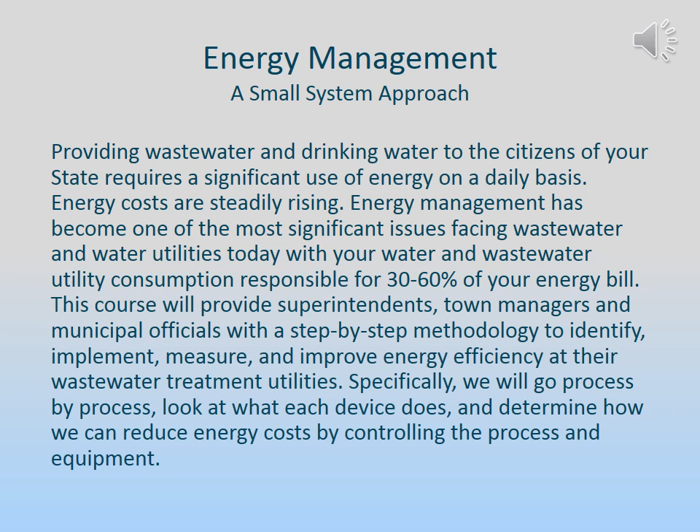So remembering that our primary function is to be in compliance with state and federal regulations, regulations relating to our NPDES permit and the Safe Drinking Water Act, we can review measures we can implement to conserve energy. Obviously, we have to look at our permits first, before we can start looking at energy conservation. We are also going to discuss how to implement and monitor the progress of an energy conservation program.

Upon completion of this training, participants should be able to: 1. Describe and understand basic electrical terminology. 2. Read and interpret a utility electric tariff. 3. Understand how to organize your conservation effort. 4. Know how to determine your present energy consumption and how to conduct a survey of specific equipment and processes. 5. Evaluate potential energy conservation measures, or ECMs. And 6. Discuss how to implement and monitor your progress and success.

The goal is to discuss what are considered reasonable ways to try to save some energy for this industry, by organizing a conservation effort and by learning more about the energy conservation opportunities of the different types of equipment. Furthermore, we will discuss how to evaluate what changes can be made to save energy and review energy conservation measures, or ECMs.

Course Agenda. This training course has 5 training modules. Number 1: Energy Conservation, small wastewater treatment plants, biological processes. Number 2: Definitions, formulas, and basic concepts. Number 3: The Energy Management Plan. Number 4: Performing an audit and assessing data. Number 5: Process and Equipment, ECMs.

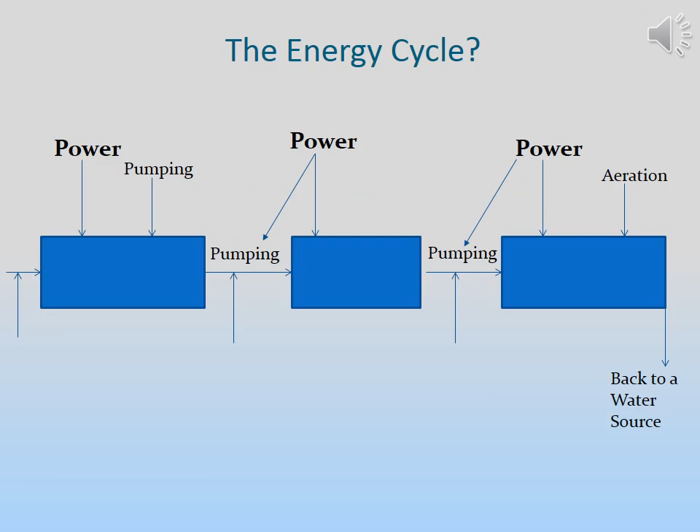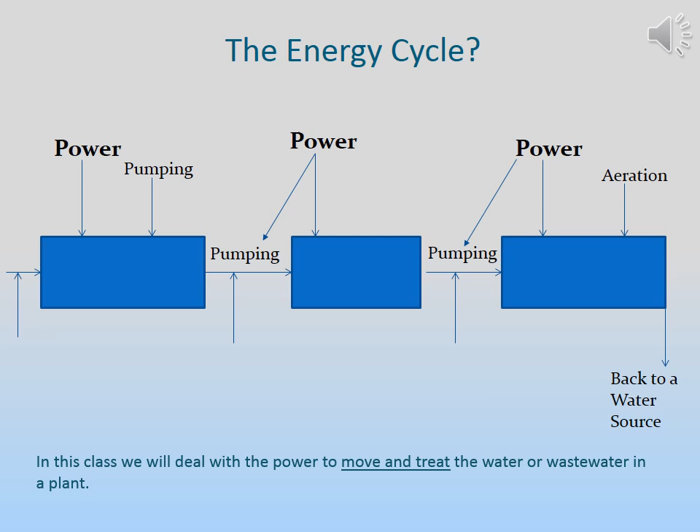The energy cycle. When talking about the energy cycle for water and wastewater systems, start at the water source. The source of the drinking water may be groundwater or surface water. The next component of the cycle would generally be some sort of treatment, which could range from a complete surface water treatment plant to just a well with a chlorinator. Regardless, a certain amount of energy will still be required to operate the facility. So start with the water source, and from there we have water treatment.

Next, water is pumped into the distribution system. There might be intermediate pumping stations in the distribution system used to get the water to a higher elevation or different pressure zone. Water is then supplied to homes and businesses throughout the system. The wastewater generated by these consumers then enters the collection system that delivers it to the wastewater treatment facility. In order to get this wastewater to the treatment facility, most collection systems include pump stations at appropriate locations, which of course are significant energy users. This energy cycle therefore includes all of the above components that consume energy and are opportunities to reduce energy consumption.

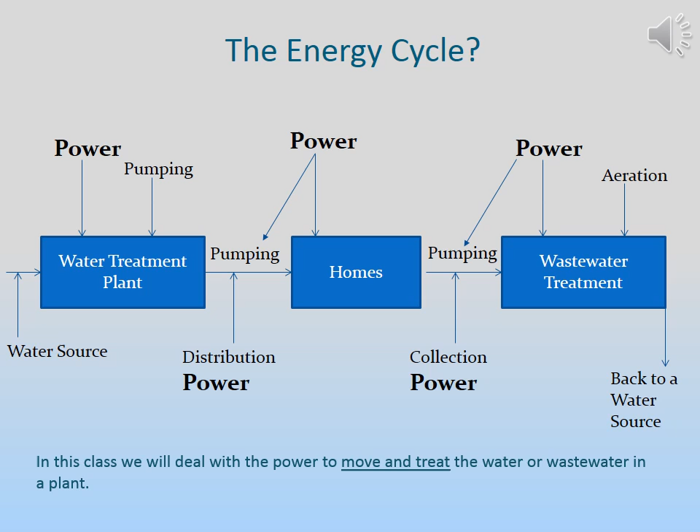In Maryland, many of the wastewater treatment plants are at the limits of technology. This new technology involves a lot more controls and a lot more equipment. The challenge is how this is managed while trying to save energy and not jeopardizing compliance with the NPDES permit.

Energy conservation and biological process. For those smaller wastewater treatment plants that are essentially activated sludge facilities, a key component in terms of making those plants operate properly is providing adequate aeration. Aeration is provided by blowers, which are generally run continuously in order to ensure adequate treatment. The BNR and ENR plants are now going a step beyond the basic activated sludge process since they require nitrogen removal and phosphorus removal. With higher levels of treatment, there are additional quantities of waste sludge generated that must be accounted for. This provides another area of increased energy use that has to be considered.

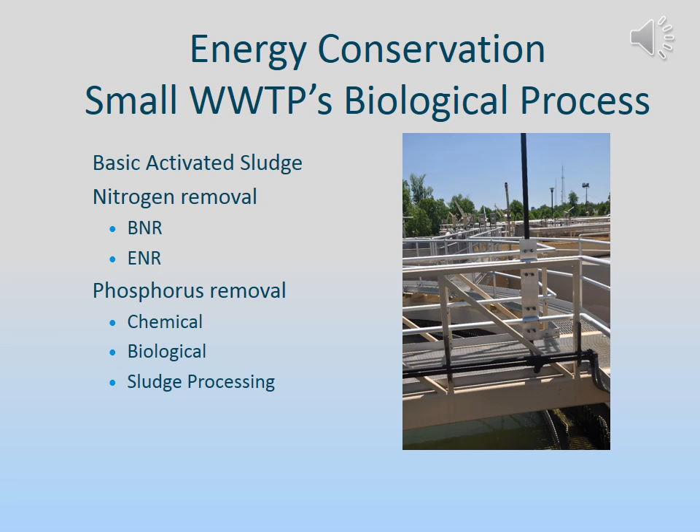This is the definition of total nitrogen. The ENR permits have a yearly limit or cap based on total nitrogen and total phosphorus. The BNR plants in Maryland, for example, have permits that require meeting a total nitrogen of 8 mg per liter. The new ENR permits in Maryland are based on yearly caps of pounds per year. That is based on total nitrogen of 4 mg per liter.

This is really tight as a state policy and is probably the strictest limit found anywhere in the country at this time. These ENR permit limits are at the limits of technology. This needs to be emphasized because if adjustments are made to save energy, it is important to keep in mind the permit limits the plant has and what kind of performance has to be maintained at your treatment plant.

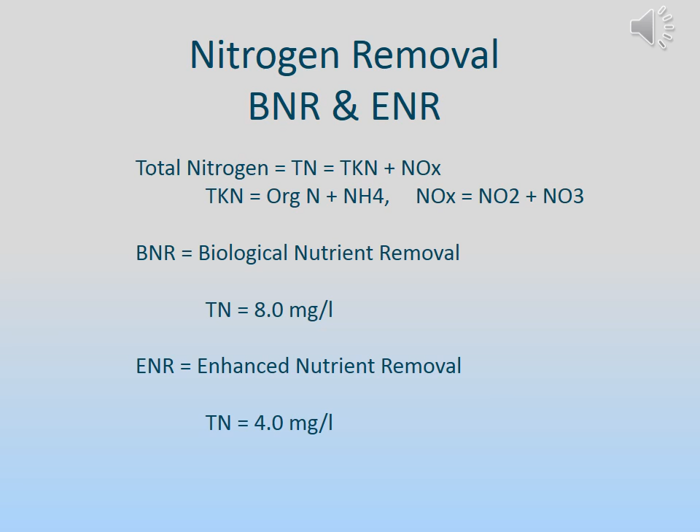The first step in reducing total nitrogen is nitrification. It is converting the ammonia nitrogen to nitrate nitrogen. This requires aerobic conditions. In order to take the first step in reducing nitrogen, we have to have aerobic conditions to convert ammonia to nitrate. How do we get aerobic conditions? What piece of equipment is critical for aerobic conditions? Blowers. Blowers are obviously one of the big energy users. Dissolved oxygen levels in the aerobic zone should normally be somewhere in the 2 mg per liter to 4 mg per liter range.

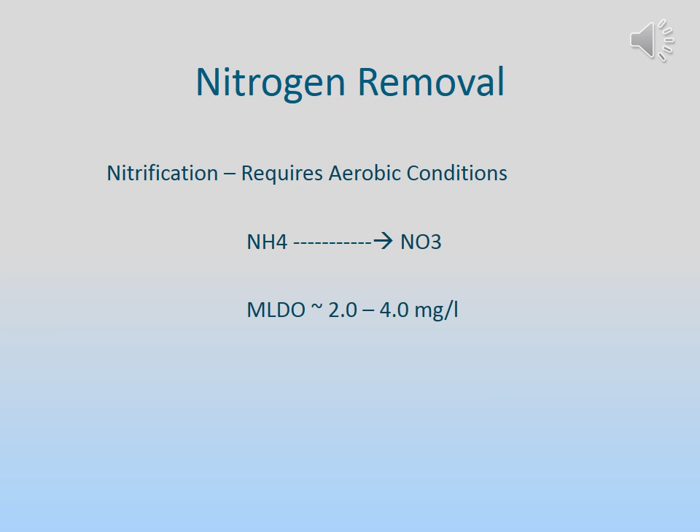The next step is denitrification. This occurs when the nitrate is converted to the nitrogen gas that is released into the atmosphere. This is how a plant meets the total nitrogen level. This denitrification process has to be done under anoxic conditions. Anoxic conditions means no dissolved oxygen or DO, or the minimal DO possible. The closer to zero, the better.

So there first was one process, nitrification, where air is needed and dissolved oxygen, and then the second part of the treatment process where there cannot be any dissolved oxygen. This is where balancing can become complicated. In order to meet that total nitrogen, the air volume and dissolved oxygen concentration must typically be in the 2 to 4 milligrams per liter range in the aerobic stage, but be near 0 milligrams per liter in the subsequent anoxic stage.

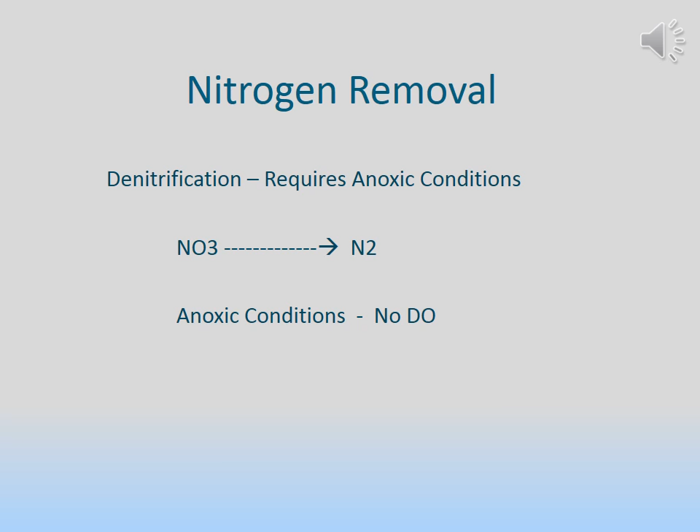To do this, the air cannot be turned down completely to get anoxic conditions, because if the air is turned down too much, there will not be enough air provided to convert the ammonia to nitrate. Nitrification will be incomplete. That is why it becomes a balancing act when trying to consider energy conservation, while at the same time making sure meeting the permit limits are not jeopardized.

This is an old slide of the Western Branch plant, which was one of the first plants in Maryland that went through a full upgrade for BNR at that time. Now they are an ENR plant. They still have essentially the same 3 stages. They have aerobic conditions to reduce the biological oxygen demand, or BOD, first using aeration tanks and clarifiers. Then they have additional aeration for nitrification, converting ammonia to nitrate.

Then, once they have done that, they have to get rid of the nitrate, so they go into anoxic conditions where denitrification occurs. In order to do that, they have to add an external carbon source like methanol, because the carbon source that is coming into the plant, BOD, is gone by the time that they get to the end of nitrification. Because most of the BOD or food is consumed in the first stage, an external carbon source, such as methanol, is added to provide the denitrifiers the food source they need to reduce the nitrates to nitrogen gas.

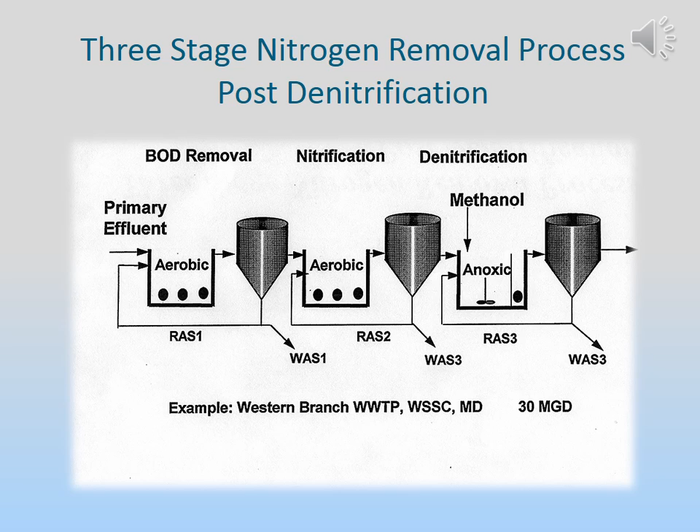Now, those who have ENR plants right now might be saying, "My plant is not like that." And that is true because the technology has evolved over the years. With this design, there were 3 discrete sections of the plant where air could be controlled. In the first section, there was enough to get the BOD removal. Then you can control the aeration in the second section to make sure that you convert the ammonia to nitrate. And then you have another discrete section of the plant where you create an anoxic zone for breaking down the nitrate.

In the Modified Ludzack-Ettinger, or MLE, process, there is one basin typically with baffles to separate anoxic zones and aerobic zones in the same basin. It is not like the baffle actually separates the basin, where there is a discrete area with one type of bugs and another discrete area with another type of bugs. The same microorganisms exist throughout the basin.

The operator manipulates the environment in different sections of the basin to favor nitrification in the aerobic zone and denitrification in the anoxic. Within the same basin, we are trying to do the same things that the previous schematic showed in discrete sections. Nitrify in one section, denitrify in the other section. Here, the nitrifying and denitrifying is in one large basin, so here is where the balancing act comes in. We do not want any DO in the anoxic zone, but we do want DO in the aerobic zone.

And we are returning solids from the aerobic zone back into the anoxic zone, which means we are recycling DO to the anoxic zone. If we are trying to save energy, we can reduce the air in the aerobic zone, so we will be recycling less DO to the anoxic zone, which will help with denitrification. This is good because we want to reduce the air, because maybe we are returning too much dissolved oxygen in the anoxic zone, and it is interfering with denitrification, with breaking down the nitrate.

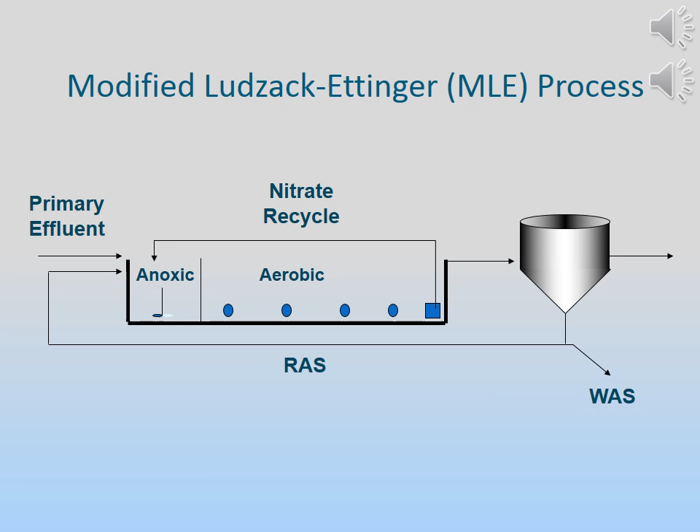But if we turn the air down too much in the aerobic zone, what can happen? We may start to lose nitrification. If we don't convert that ammonia to nitrate, the rest of the process falls apart. We can't lose nitrification. Okay, so maybe we can try to reduce the air. But it's not that simple when we are dealing with a BNR or ENR wastewater treatment plant.

What are the consequences of inadequate air and excessive air? Inadequate volumes of air will result in incomplete nitrification and high total nitrogen in the effluent. Excessive volumes of air will result in DO recycle that will inhibit denitrification and result in high total nitrogen in the effluent.

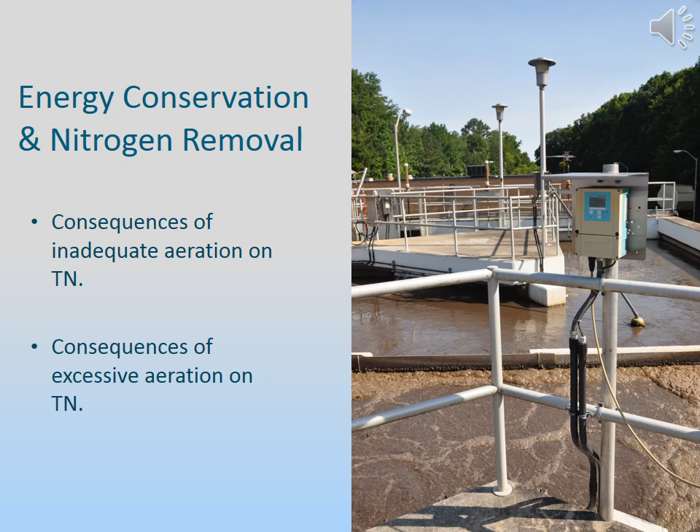Here is a treatment plant where the biological makeup of this biomass is the same all the way through, but parts of this basin are not aerated and parts are aerated. So within the same basin, there is nitrifying in the zones where the air is on, and there is denitrifying in the zones where the air is off.

This cycles every 30 to 40 minutes, where the air switches from the first 3 chains to the second 3 chains. When trying to do these two process functions in the same basin, and also balancing that with energy conservation measures, these 3 goals become a complex balancing act.

What are some of the things we can do in the treatment system to help us to add the right amount of air? We know this is not an exact science. If we are trying to save energy, what are some tools that might be available that can help us to fine-tune the amount of air and how much air we are adding in one of these processes? What are some of the key factors in these plants and the design of these plants to help us make the right decisions? A key parameter to keep an eye on is the ammonia levels.

Generally, operators collect samples and run them on their test equipment, or send them to an outside lab to make sure the ammonia is low. Now, there are reliable probes for both ammonia and nitrate that plant operators are starting to use. In the past, these probes were not very reliable, but they are getting a lot better. We have ammonia probes, we have nitrate probes, and DO probes, which have been around and relied on for ages.

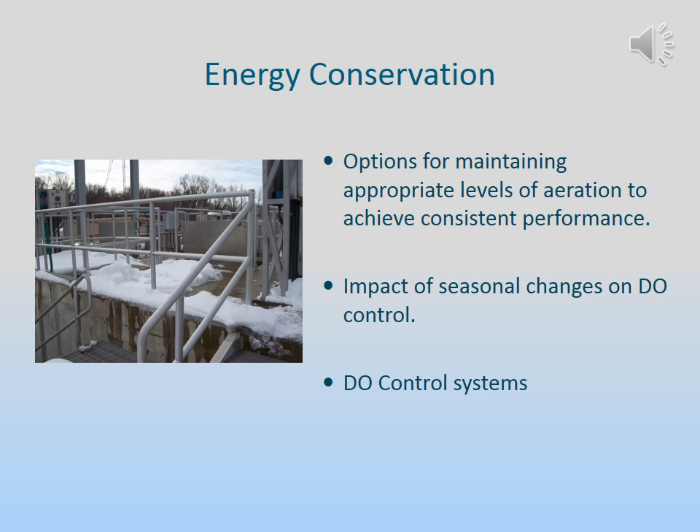It is not that simple to say, okay, just turn the air up and down, because the processes are changing all day long. The flow is changing, the temperature is changing, and DO control is absolutely necessary in any BNR and ENR plant. The newer technology uses feedback control where we have DO probes and ammonia probes working in conjunction to send signals to the process control system that could help control the amount of air we are adding.

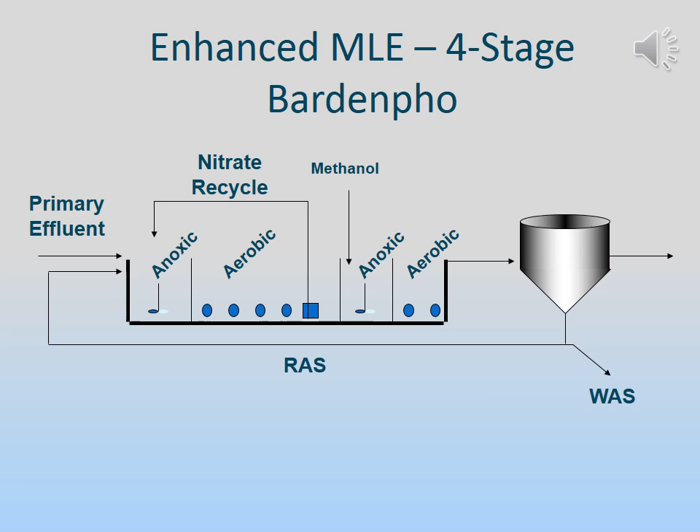This is a 4-stage Bardenpho plant, where first there is anoxic, then aerobic, then anoxic, then aerobic. This is what a four-stage Bardenpho plant looks like. This plant has an anoxic zone where they do not want DO, followed by an aerobic zone where they do want DO. Then there is another anoxic zone, followed by another aerobic zone in the back end.

With each of these zones, it is not like these baffle walls are completely separating one zone from the next. The flow is going around and underneath. There are openings in these baffle walls, and so managing the amount of air they put in is going to affect how well they nitrify and denitrify in the same basin.

They also have DO probes, but they do not have ammonia and nitrate probes. When there are DO probes, they must decide where to put them, making sure they have good probes that are reliable. They must check them by calibrating them regularly. These design issues are absolutely critical to ensure they accomplish goal number 1, which is to meet their permit. Then goal number 2 is to try to do it as efficiently and cost effectively as they possibly can.

Biological phosphorus removal in plants like a 5-stage Bardenpho process includes an anaerobic zone for enhanced biological phosphorus removal. But there are still aerobic zones to ensure efficient biological phosphorus removal. Most of your plants are probably using chemical feed systems. One of the things seen in most of the plants are the chemical feed systems used for phosphorus removal, whether we are adding chemicals like alum, ferric, etc.

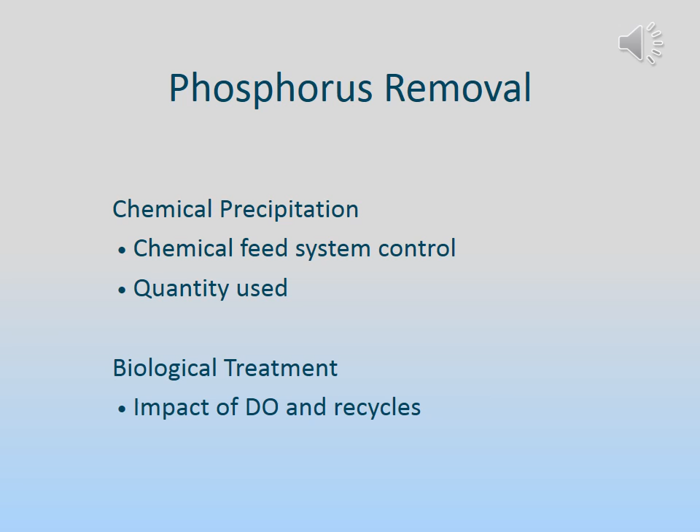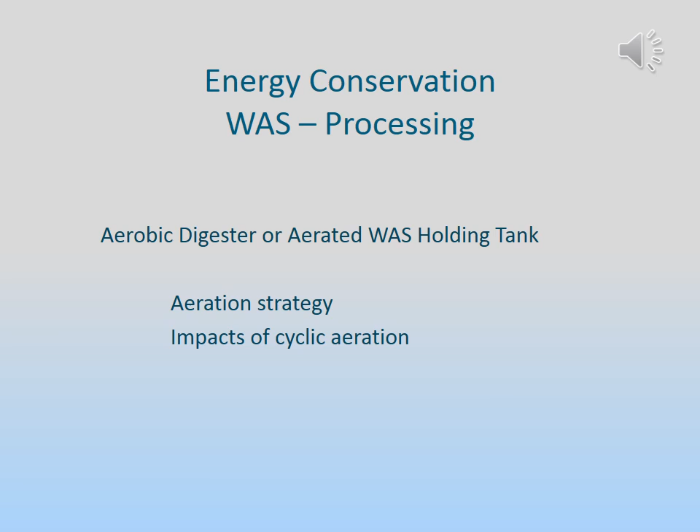Let's talk about saving energy. We want to talk about specific equipment, but we have to understand that our number one priority is always going to be meeting these stringent nitrogen and phosphorus limits. So we have to balance that with trying to save energy. This won't be easy all of the time. We have done energy audits in the ENR plants in Maryland, and we found that their tight limits put a limit on how much we could do as far as energy conservation.